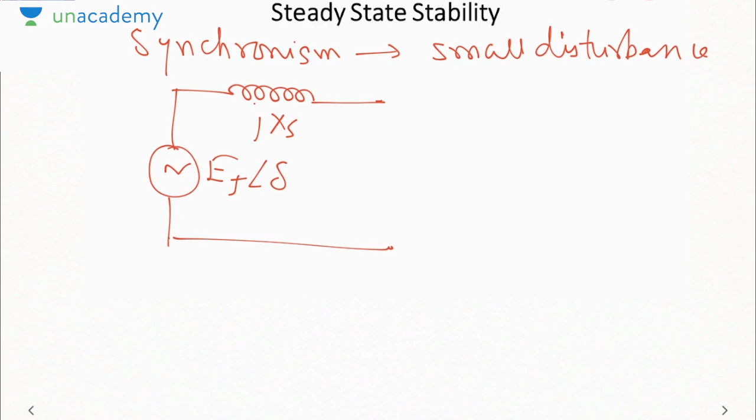Now electrical power of a generator is given as mod V mod E by X sin delta, or we can say P max sin delta. Now what happens is that steady state will be when

the speed of the machine is constant, that is, the rotor of the generator rotates at a constant speed. That means acceleration must be 0. If acceleration is 0, from the swing equation I can say Pm is equal to Pe, because Pm minus Pe must be 0.

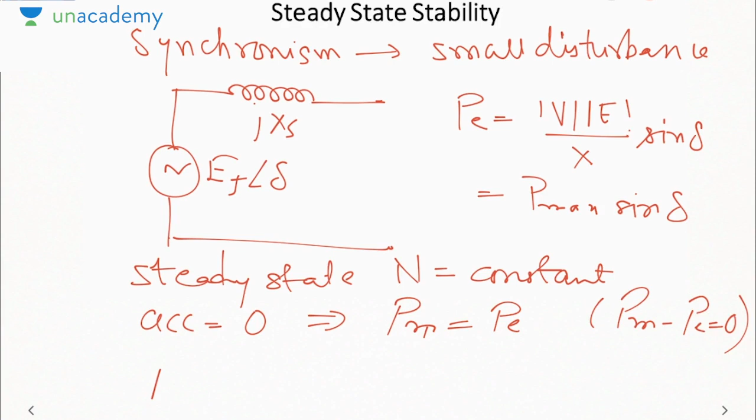Pm minus Pe is also called Pa, which is your accelerating power. So there must be no accelerating power to reduce the acceleration to 0 and make the speed constant.

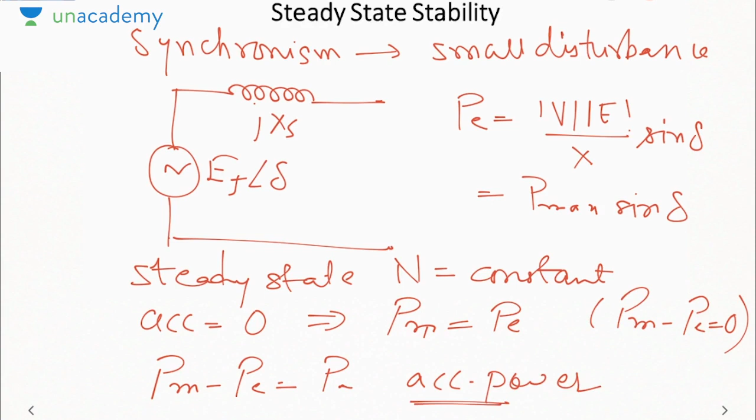Now suppose initially the machine was operating in steady state. Before the application of a small disturbance, the machine is operating in steady state. Then Pm will be equal to Pe naught.

Let us say this is equal to Pmax sine delta naught. From here I can calculate delta naught, which is sine inverse of Pm by Pmax. So this is the initial operating angle of the rotor.

Now suppose I change delta naught to delta, where delta is delta naught plus delta delta. Then what will happen to Pe? It will become Pmax

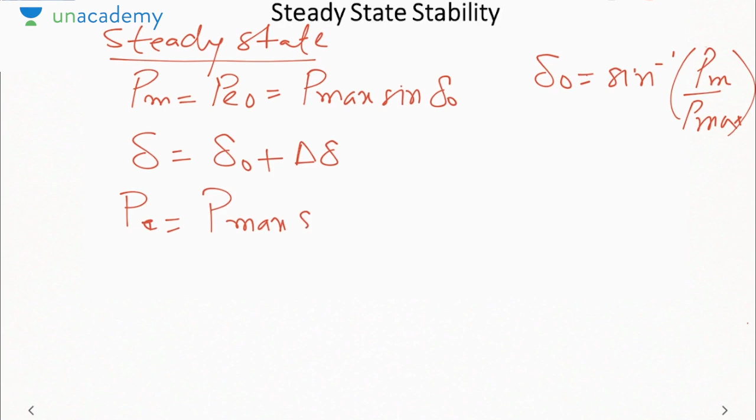sine of delta naught plus delta delta, which will be Pmax sine delta naught cos delta delta plus Pmax cos delta naught sine delta delta.

Now since delta delta will be small, we are talking about a small disturbance, sine of delta delta can be replaced by delta delta and cos of delta delta can be taken as 1.

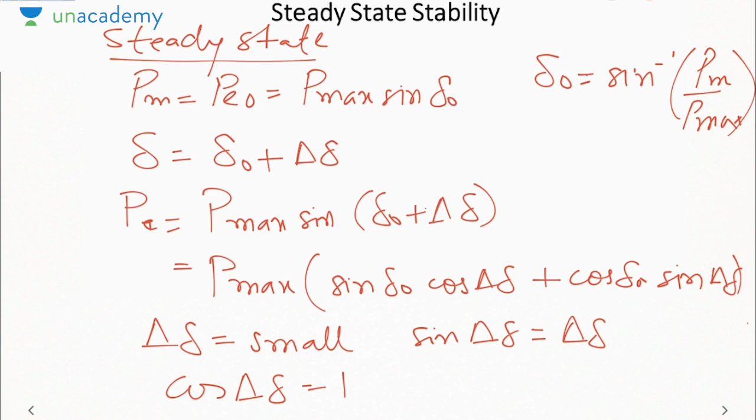So it will become Pe is equal to Pmax sine delta naught plus Pmax cos delta naught into delta delta.

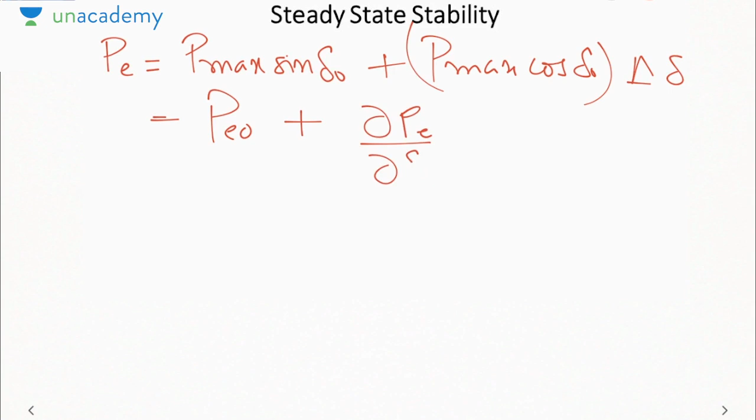Now this is actually Pe0 plus del Pe by del delta at delta naught into delta delta. Del Pe by del delta is also called the synchronizing power coefficient for a synchronous machine.

Now suppose we apply the swing equation: m d square delta by dt square is equal to Pm minus Pe. This will be equal to Pm minus Pe naught minus del Pe by del delta into delta delta.

Now del P by del delta will be taken at delta naught. We know that Pm is equal to Pe naught, so this will get cancelled out. So here I have assumed that the mechanical input remains constant equal to Pe naught.

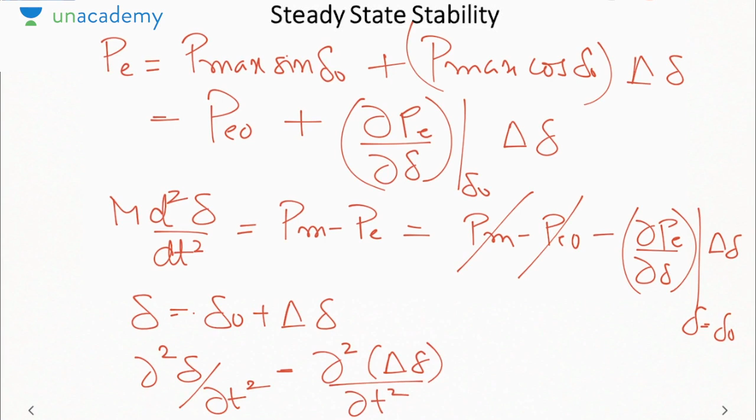Delta is also equal to delta naught plus delta delta. Hence del square delta by del t square will be del square delta delta by del t square. So this equation will become

M del square delta delta by del t square plus del P by del delta at delta naught into delta delta. To determine the characteristic roots, first we have to determine the characteristic equation.

So what we will do is del by del t will be taken as d, del square by del t square will be taken as d square. So it will be m d square plus del P by del delta at delta naught into delta delta must be 0. So the roots of this equation will be d is equal to plus minus under root minus del P by del delta at delta is equal to delta naught by m.

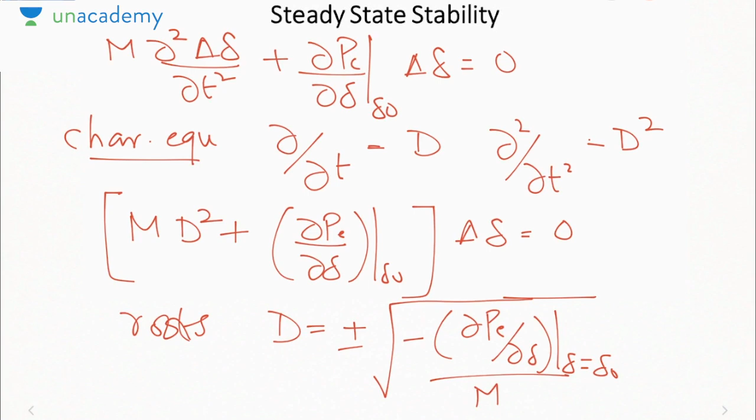Now there can be various cases for the roots of this equation, that the roots are real or the roots are imaginary. Now suppose we talk about the first case in which del P by del delta at delta is equal to delta naught is less than 0.

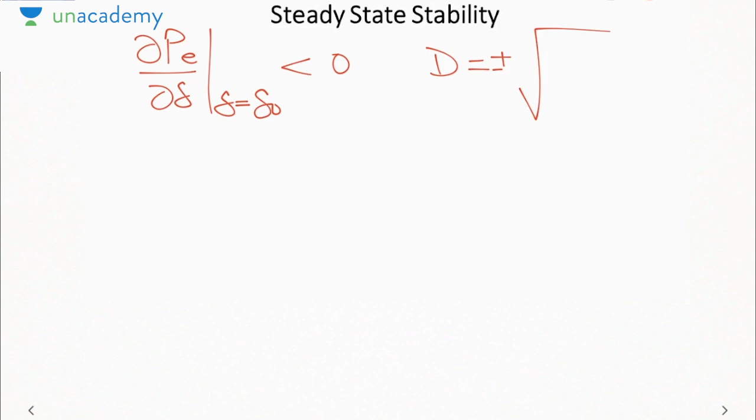Then the roots which are equal to this, the inner part, that is minus of del p by del delta, will be greater than 0 because del p by del delta is less than 0. So roots will come out to be real. Let us say that d comes out to be plus minus m.

Then delta delta will be c1 e raised power mt, c2 e raised power minus mt. So with respect to time, how delta delta will vary? It will vary like this, increasing exponentially. So that is why this system will be unstable.

Why? Because if we introduce a small disturbance, then the rotor angle will keep on increasing. There are no oscillations and there is no boundation. It will continuously increase from a 0 value to a very high value. So this is the case of an unstable system.

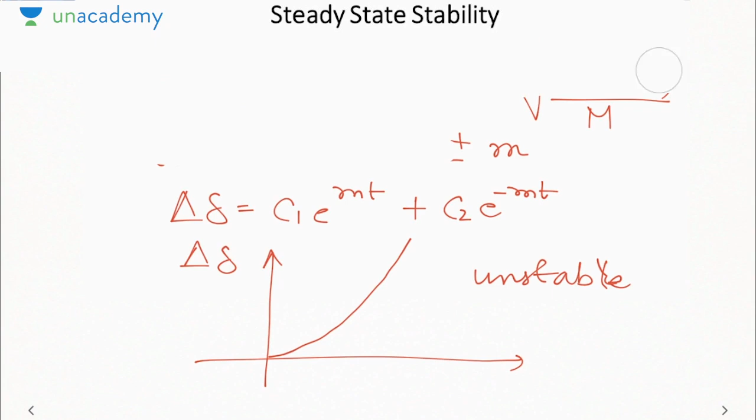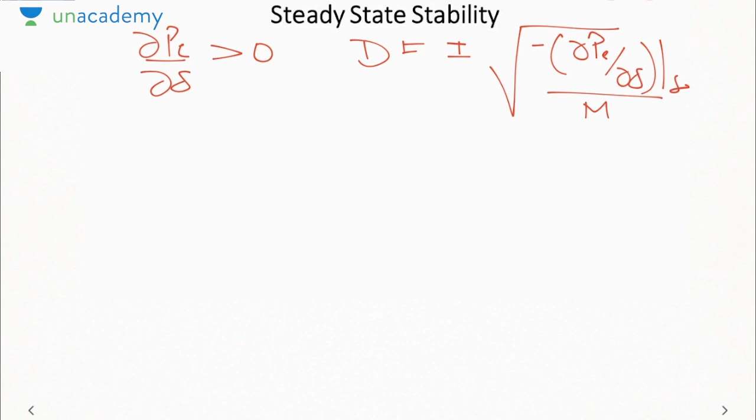Let us take another case. If del p by del delta will be greater than 0, then the roots which are equal to d is equal to plus minus del p by del delta at delta naught by m. Since del p by del delta is greater than 0, these roots will be imaginary. Let us say d is equal to plus minus j omega.

So here then delta delta will be written as c1 cos omega t plus c2 sin omega t. Now here, since cos and sin terms are coming, that indicates that the response of the system is oscillatory. So how it will be? Like this. So here we have oscillations which are bounded. Since it is bounded, system is stable.

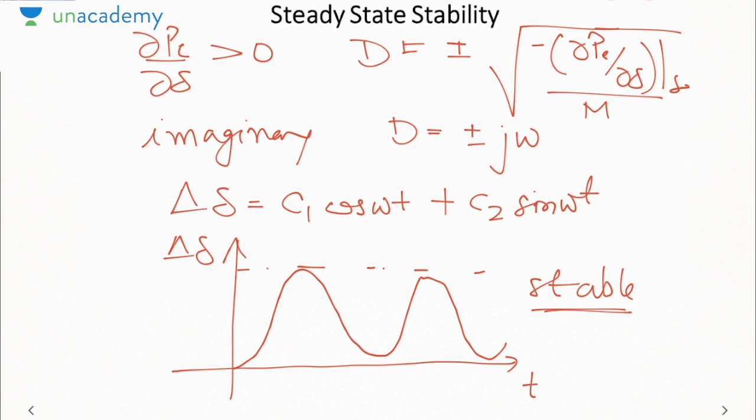Also, we are neglecting any sort of damping here. If damping were considered, then the nature of the graph will be like this. Delta delta will finally go to 0, so that system settles down to its initial position. So the oscillations will be damped out. So that system will be termed as stable.

Now here the frequency of oscillation is given by omega, which is equal to under root minus del p by del delta at delta naught by m. This formula can also be written in terms of h.

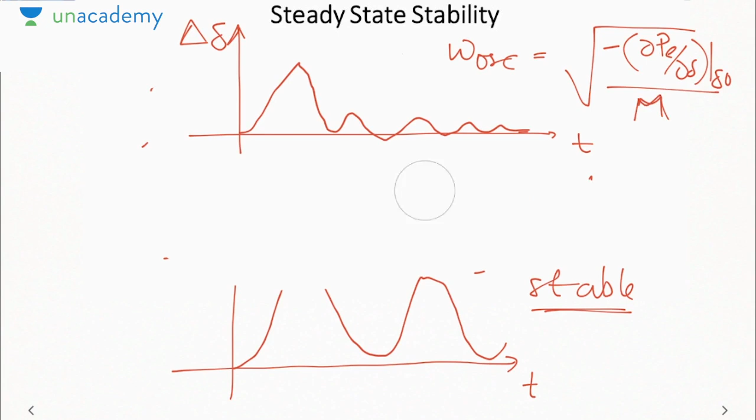Then how it will be? Minus del p by del delta, m can be replaced by gh by pi f. Now if g is coming, we can replace it like this: del p by del delta, but in pu upon h. Earlier del p by del delta will have the unit megawatt per radian, but now we are expressing in pu after dividing it by g.

So this will give the frequency of oscillations when a small disturbance is applied to the system. And we have seen that the system will be only stable if your del p by del delta is greater than 0.

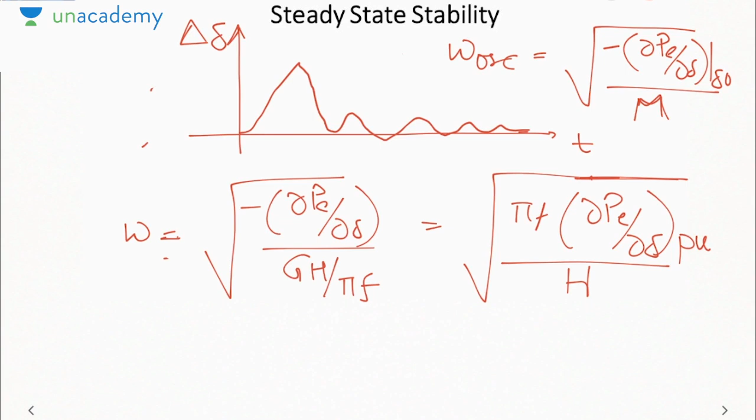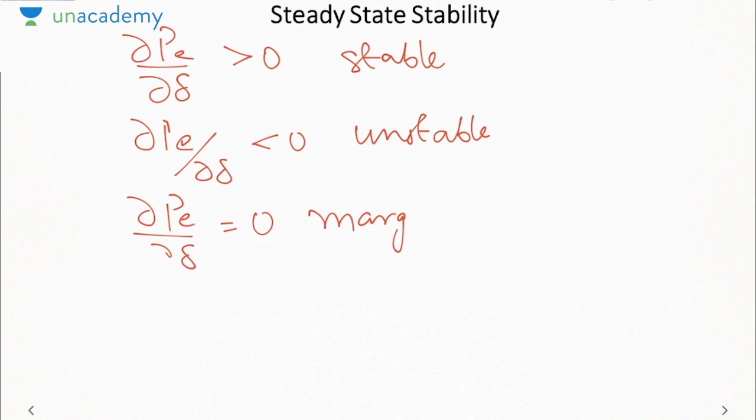So what will my stability criteria become? If del p by del delta is greater than 0, system is stable. Del P by del delta is less than 0, system is unstable. If del P by del delta will be equal to 0, system will be marginally stable. I use these concepts in transmission and distribution also, but they are derived here like this.

Now we know del P by del delta is actually P max cos delta. If it is greater than 0, then delta belongs to 0 to 90 degree. If it is unstable, delta belongs to 90 to 180. If it is marginally stable, delta is equal to 90 degree, where power will be equal to P max.

So here the system is marginally stable, hence P max is also called as steady state stability limit. Because if you try to draw power more than P max, then system will become unstable or it will lose synchronism.

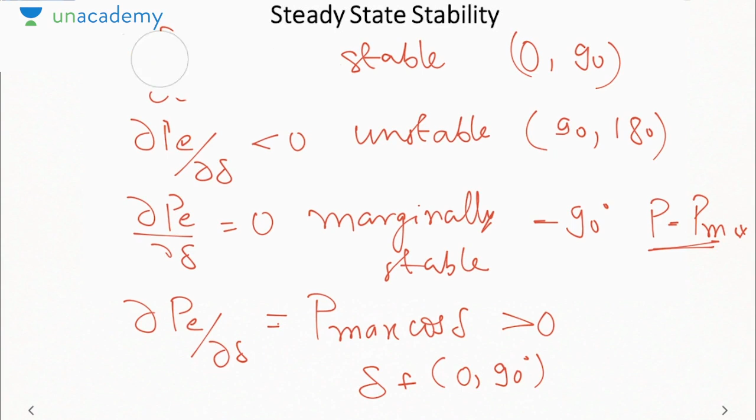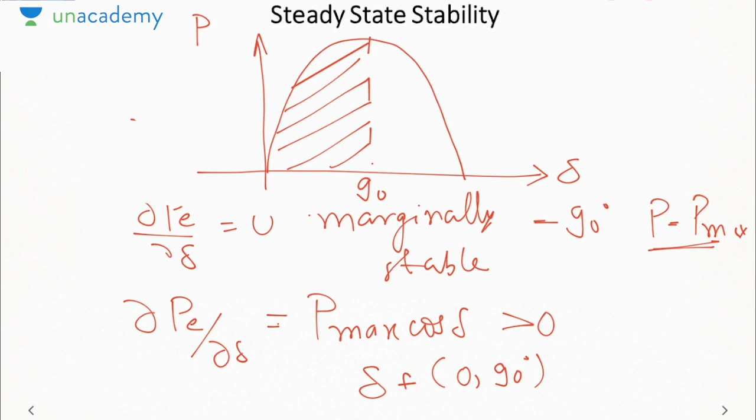If we understand this in terms of power angle curve, so this region is stable and rest of the region is unstable, and delta is equal to 90 is marginally stable, or that is the limit of the stability. This fact was directly used in synchronous generators also, that the region from 0 to 90 is the stable region for synchronous machine operation.

Now, how to improve steady state stability? First of all, what is meant by improving the steady state stability? It means we have to increase the steady state stability limit, or Pmax. If you increase Pmax, it will be termed as improving the stability, because the system will be unstable if power exceeds Pmax. If Pmax itself is very high, then the chances of unstable operation are very low. So you have to increase Pmax in order to improve the stability of the system.

Now how to increase Pmax? Pmax is actually mod E mod V by Xs. So the first method will be to increase mod E, which is done by operating the machine under overexcited condition. High excitation EMF implies that the machine is running at overexcited condition. We cannot change terminal voltage because it depends on the voltage of the bus bar or the infinite bus bar or the grid, so that it remains constant.

We can reduce transfer reactance, or we can reduce synchronous reactance. How to reduce transfer reactance? We can use series compensation. If you use a series capacitor, that reduces the reactance and increases Pmax. By using a double circuit line, equivalent inductance will be L by 2, as two lines will be connected in parallel, hence the reactance reduces.

...then what will happen is E times cos delta plus J sin delta plus 1, by 2. Now 1 plus cos delta will be 2 cos square delta by 2, plus J into 2 sin delta by 2 cos delta by 2. So we can take out common 2 cos delta by 2. So it will be E cos delta by 2, times cos delta by 2 plus J sin delta by 2. So it will be E cos delta by 2, angle delta by 2.

So this will be the midpoint voltage of the transmission line. Now to calculate the Thevenin equivalent completely, we need to find the Thevenin impedance. For that we will short circuit all the EMF sources. So what we will do is short circuit these sources. Now if we calculate the equivalent reactance, Jx and Jx are in parallel, so X Thevenin will be X by 2. So it comes out to be X by 2.

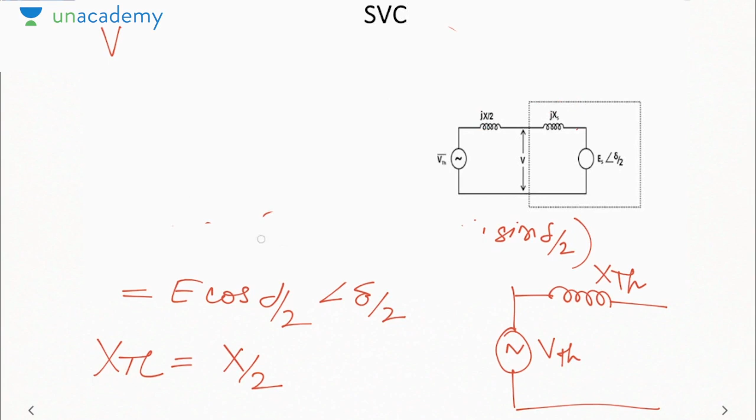Now we have the Thevenin equivalent, which is V Thevenin, E cos delta by 2 angle delta by 2, and X Thevenin. So what to do now? To solve the system, we will connect the SVC at the midpoint, or connect the SVC to the Thevenin equivalent about the midpoint. So the circuit shown in this figure indicates that once we have the Thevenin equivalent, we have connected the SVC with it. Here V Thevenin is E cos delta by 2 angle delta by 2. X Thevenin is actually X by 2.

Now the first condition that we studied was SVC must not exchange any real power, only reactive power must be present in SVC. Now we know the real power, when resistance is neglected, always flows from a higher angle to a lower angle. Since real power is 0, the angles of both the voltages must be same. Hence what we are doing is representing SVC by a reactance in series with an EMF source. Reactance is XS, EMF is ES, but ES will also have an angle delta by 2.

Because there must be no real power exchange between the midpoint and the SVC, the midpoint voltage as well as the SVC must have the same phase angle. Otherwise power will tend to flow from higher angle to lower angle. Earlier, when we did not place SVC, this was the midpoint voltage.

Now let us calculate the midpoint voltage after connecting SVC. We will assume a current I, which will be E cos delta by 2 angle delta by 2 minus ES angle delta by 2, divided by j times x by 2 plus XS.

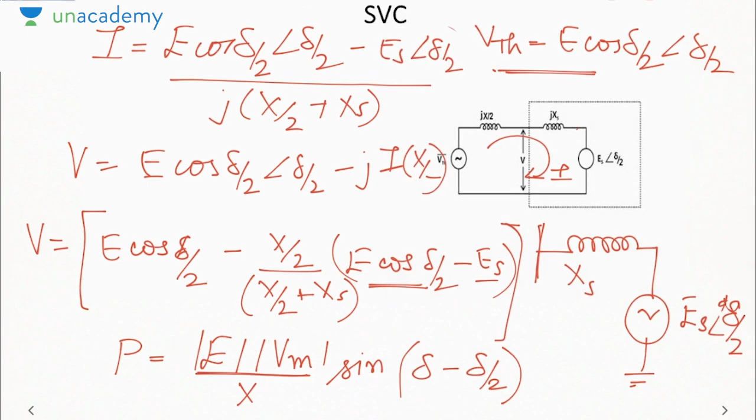I am substituting the value of Vm in the expression: minus x by 2 divided by x by 2 plus XS, multiplied by E by X sin delta by 2, giving mod E square by X minus mod E into ES by X, multiplied by sin delta by 2. So this will be the power.

If XS is taken as 0, this factor will become 1, minus E square by 2x sine delta, so this gets cancelled out, plus mod E square by x sine delta by 2. So power will be mod E square by x.

Sine delta by 2. Now when SVC was not connected, the sending as well as receiving end voltage was equal to E, and the reactance between sending and the receiving end was 2x. So P initial was mod E square by 2x sine delta. So now if you see, Pmax after connecting SVC is equal to 2 times Pmax before connecting SVC.

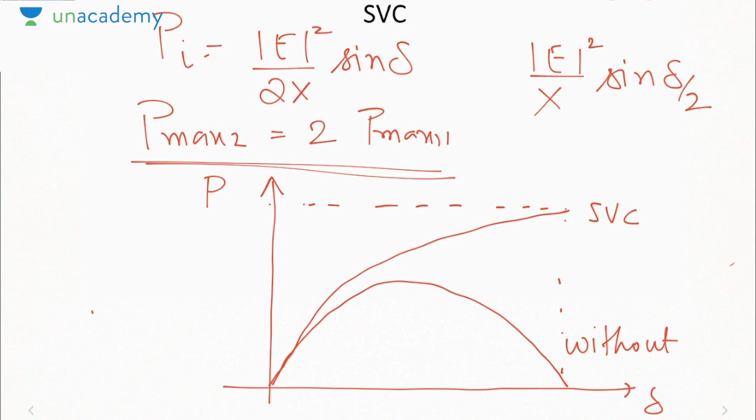So let us summarize what we covered in this lecture. We first saw what is the meaning of steady state stability.

Then we derived steady state stability using the swing equation. We arrived at the criteria that del P by del delta must be greater than 0 for stability.

Then we saw how to improve steady state stability, which was by reducing the transfer reactance or by increasing the EMF. One of the methods we saw was to use SVC.

When we use SVC, power becomes mod E square by x sine delta by 2, where x is equal to transfer reactance by 2, because the reactance between the sending and receiving end was represented as 2x. So x is actually half of the reactance between the sending and the receiving end.